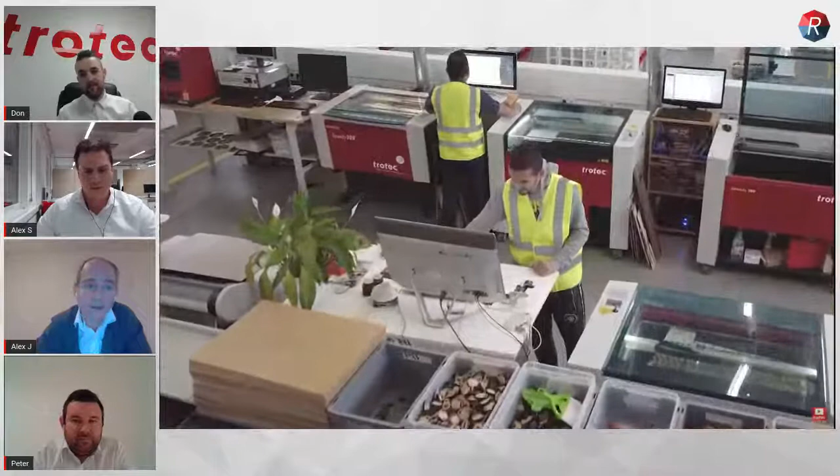On Ruby, we are really excited here at Trotec that now everything is coming together and Ruby and the world are meeting. The response to the open beta is really outstanding. To be honest, in the beginning there was some initial skepticism, and I totally understand, because when you change something that is well known and loved by the people, everybody was like, okay, where's my job control going?

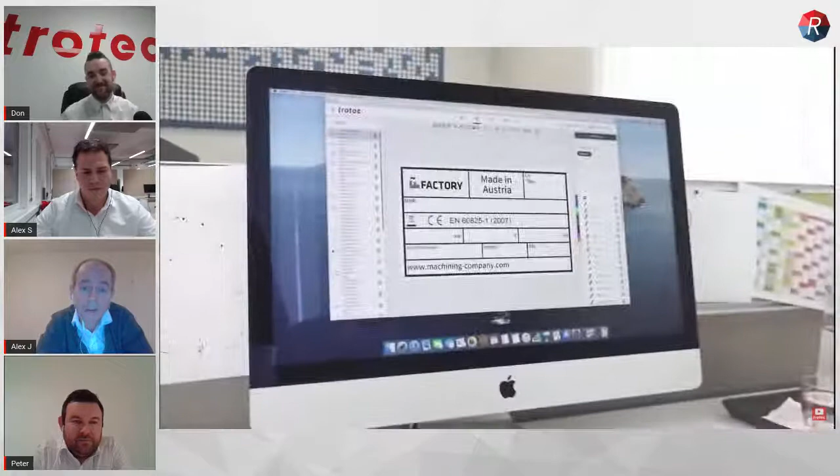And we're going to answer this today too. But now we already have a lot of Ruby fans. People love how the photo engravings turn out, the import functions, hot folders. We're receiving requests that people want to use the Ruby API to connect their web shop to it and to fire their lasers from external software programs. So we just gained a lot of insight in a very short period of time in the last weeks.

And this is exactly why we are doing this open beta, to learn from you and to drive and develop Ruby together with you and to change the laser world. So thank you for your contribution and contributing to Ruby. We're going to continue to do this.

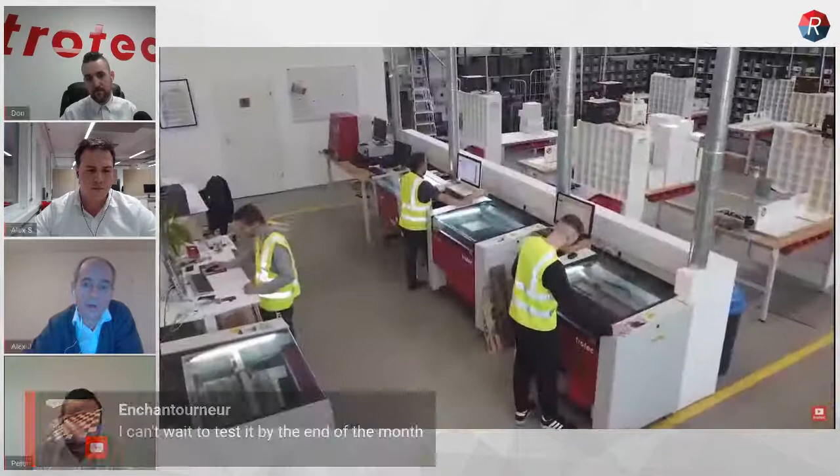So why is Ruby there? We started this initiative, I would say, a few years ago when we developed Job Control 10. So this was quite a while ago. And at that time, we realized that how people work with their lasers has changed. Laser engraving and cutting is not what it was 10 or 15 years ago. It went from the garage to manufacturing settings and to workshops. So it's big business already.

A lot of our customers multiplied their business. So the requirements, what the software should do and has to do, changed and increased. People wanted to operate multiple lasers at the same time from one PC. They want to use Macs, they want to use a mobile phone and tablets to control the lasers. They want software where they can easily create their laser jobs and work with their laser parameters, very simple and straightforward.

And the laser should not be a standalone unit. The laser should integrate into a total overall workflow and exchange information and files with other systems like ERP, MIS, or webshop e-commerce systems. Multiple users, multiple roles, and pre-press integration - that's really a must. So the demands from the users, what we experienced in the last years, really increased.

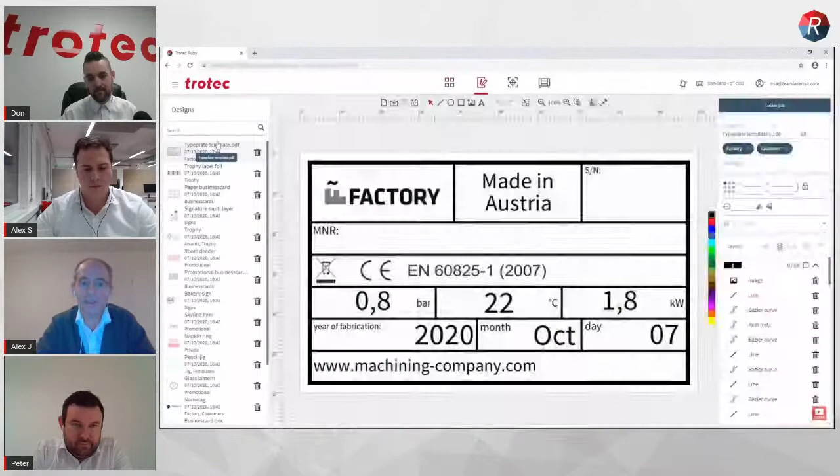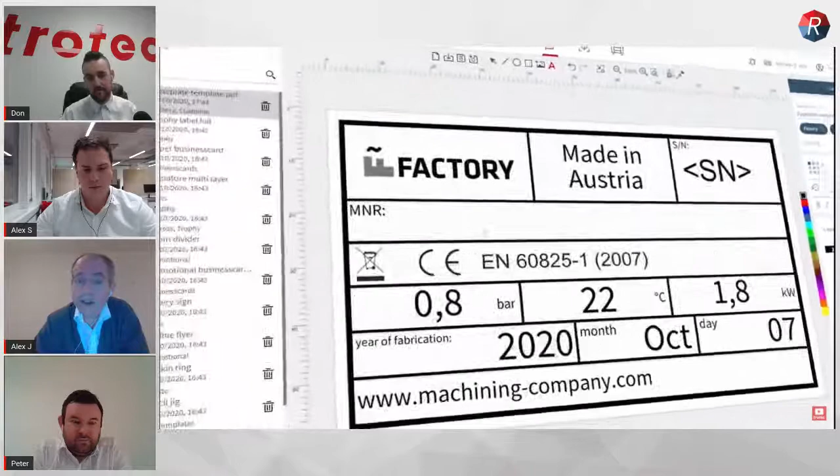And that's what we like to do with Ruby. Ruby stands for all that. We want to connect lasers. We want to connect laser users. Ruby is open to any customer workflow, providing a high degree of automation. And we want to provide laser users with all the tools they need for their daily work, to really redefine laser software and to set new standards for you and together with you.

And we're doing this now with the open beta. We're embarking on a digital journey, and we would like to lead you into a new era of laser engraving and cutting. So that's my small pitch for Ruby.

And now I would like to hand over to the tall Alex, the big Alex, to give you a walkthrough and show you what Ruby is capable of and how it works. So it's your turn, Alex. Thank you, Alex.

Even we get confused sometimes. Well, thank you for the introduction. It's a pleasure really to be here today, to have all of you on this webinar today.

And well, I would like to show you and give you a first demonstration of Ruby, and give you a little introduction to what we can do with Ruby already now with the open beta, and to give you also an idea of where we're actually going. So I think first of all, and probably the most important and one of the most significant changes, is that Ruby is a web-based software.

So this will give us many, many benefits in the future. Because Ruby being a web-based software means we will be able to actually just directly use and access it from a web browser. So in this case, I just opened Google Chrome, and I can directly log into the software and start working with my laser right away. This means that in future we will be able to really access all data, all information, all customer information from anywhere, anytime, just online via the internet.

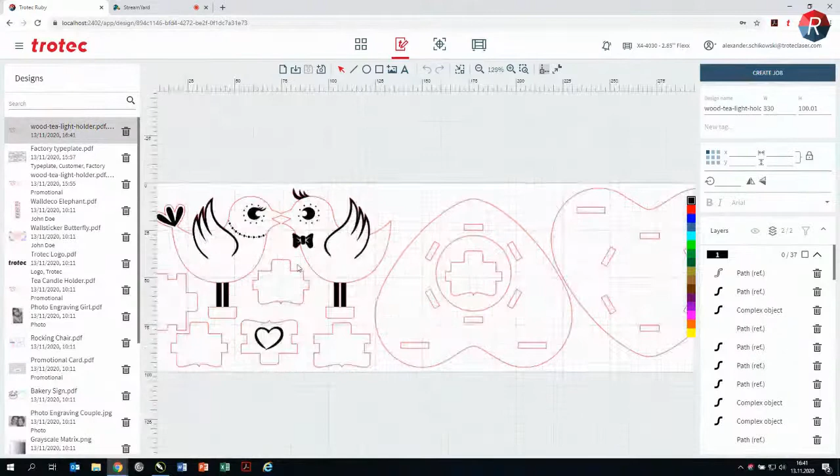So with Ruby, we can just directly drag and drop, import the PDF file. It's here now already, and I'll enlarge my screen a bit. I can directly open it in Ruby, have everything available in here, have the design in here, can have a look at it, can check it, see if everything is correct. In this case, it's all good.

I can create a job out of it now. Just with copy paste, I can duplicate the design, prepare everything for the laser, check, for instance, also the material if it's set correct. In our case, I have some Trotec material entered in the laser. So this is all good, and I can just directly push it to the laser. It's now transferred and can start lasering right away.

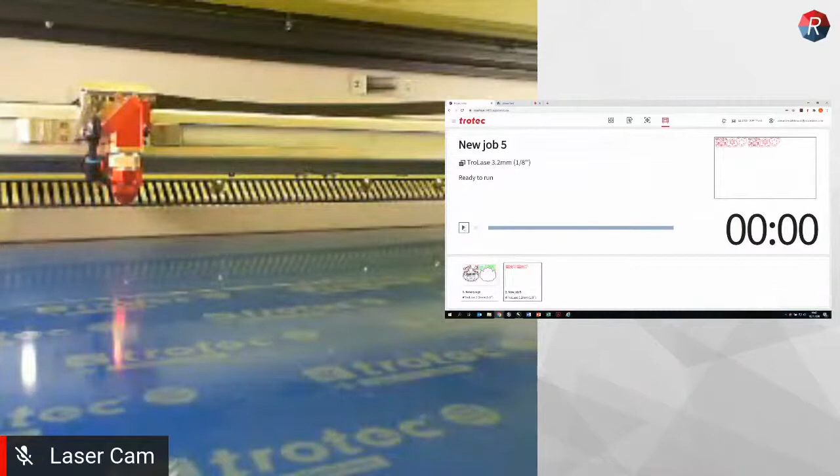The laser you see is already progressing and lasering, firing next to me. I will stop this now for a demonstration and show you another use case.

So you saw how really super easy and intuitive it is to just directly import a PDF file without actually going through any time-consuming printer driver, or also any additional graphic program, for instance. You can just directly import it.

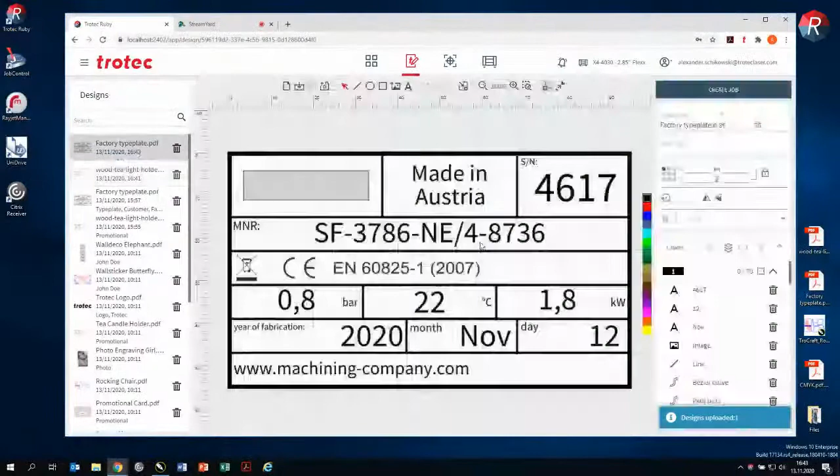But also, even if we need to make some adjustments, I will again just directly import the PDF file in here, can open it in here, and have my design available here as well. Some of you might notice this is the design file we have seen also in the Ruby launch video. And I can make adjustments directly in here now.

In our case, the date is not correct, so it's still the 12th. I can jump into here, make a correction, set it to the 13th of November, and again create a job out of it.

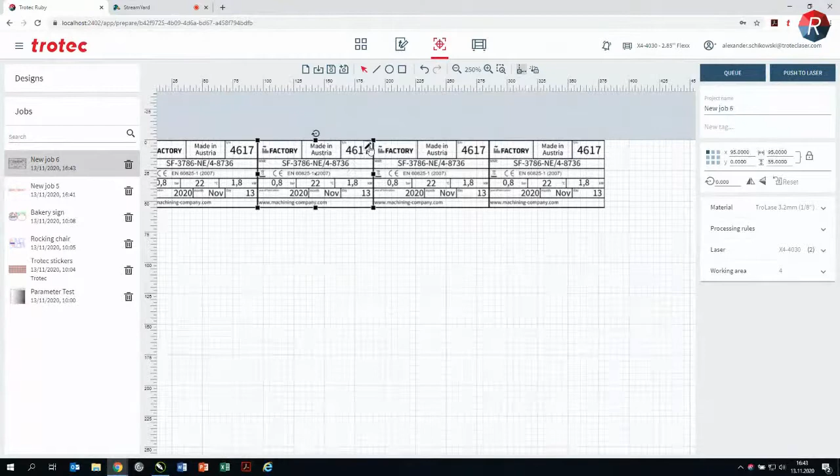I can duplicate it again with copy paste, with the shortcut on the keyboard. And I can also do a kind of small batch serialization now in here. I can directly click on the design, edit it, and increase the serial numbers.

Going to 18, going to 19, and last but not least, this one to 20.

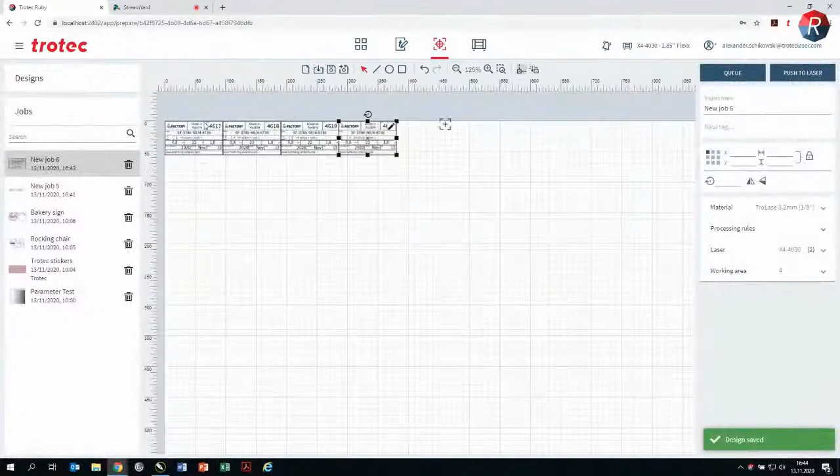I can very quickly make a small batch serialization of these templates directly in Ruby without going to a different software again or any editing program.

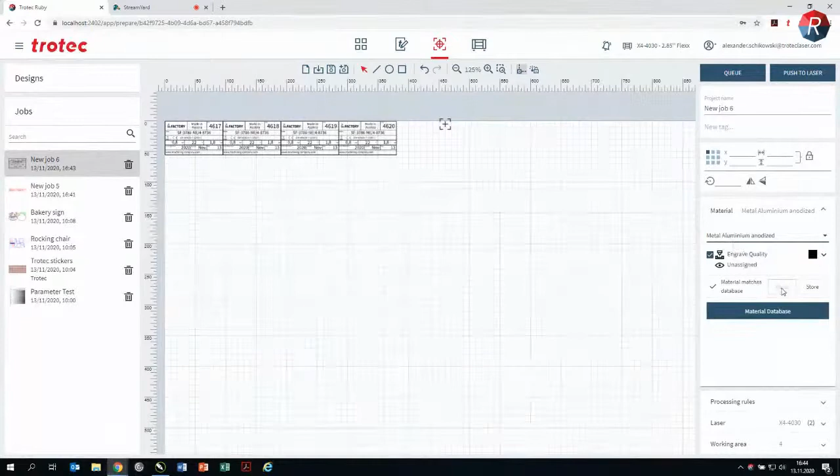And again, just select the correct material. For those templates, let's assume we are using some anodized aluminum. So it would all be correctly set again, and I can then again push it to the laser, and I could start lasering right away again.

So you see also how much flexibility Ruby gives us in terms of graphic editing functionalities. But we also understand that from time to time, users just prefer to actually stay in their graphic editor. And for this, Ruby is also providing some really cool features and benefits.

So during the open beta now, we are also delivering with Ruby a small application for Windows, called the Tray app, which is running here down in the taskbar. This tray app also contains an import folder.

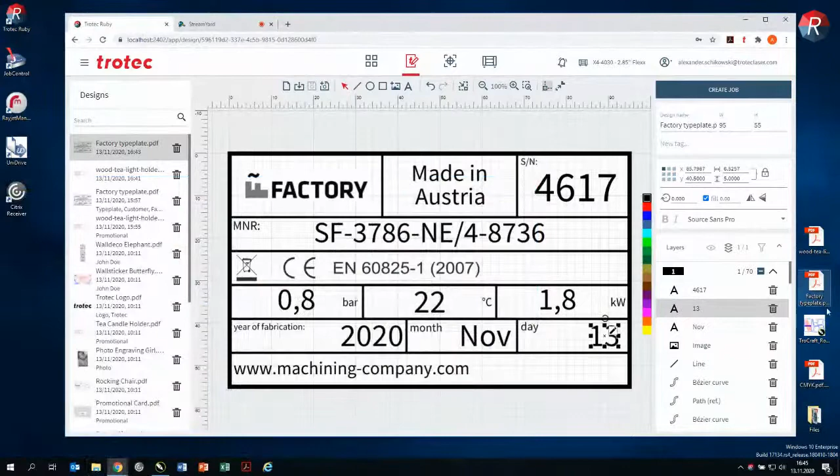So I can open this directory, and whenever I save a file to this import folder, it's automatically uploaded to Ruby. So I also prepared a job in CorelDRAW for you, this rocking chair. And when I push this now, publish this as a PDF, and save it to this import folder, it will automatically be imported in a few seconds to Ruby.

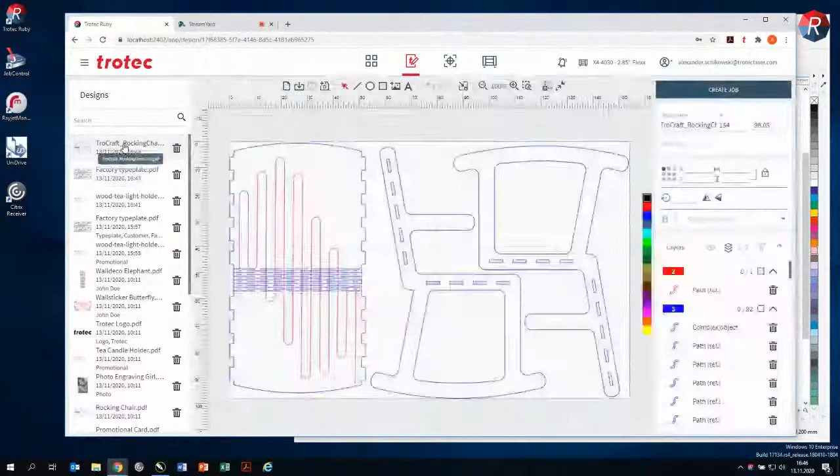And it appears already, it is ready here. So this means you do not have to actually complete the designs, for instance, if you would like to stay with your preferred graphic editing, a graphic editor, you can just directly do all this, but still, as Ruby is directly importing those files, it provides us with a lot of functionalities also now.

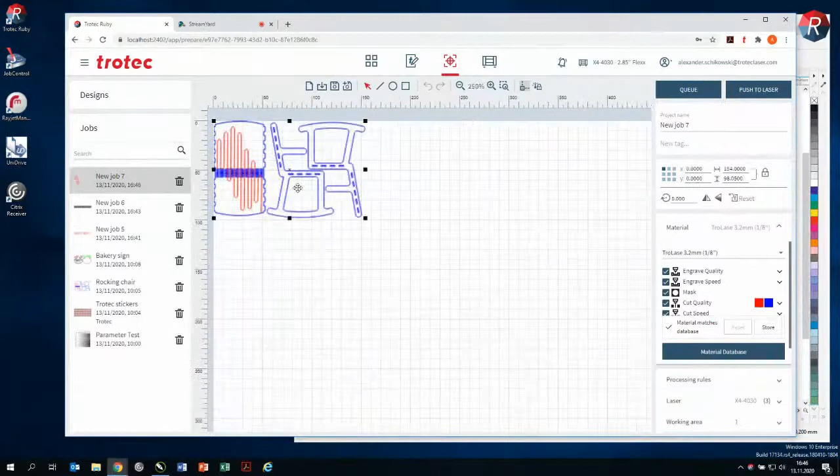We can actually also edit these designs now directly in here. So we can still, for instance, transform them, enlarge them, make them smaller, also rotate them, for instance.

So this just as an example, some examples for use cases, what we can do in Ruby.

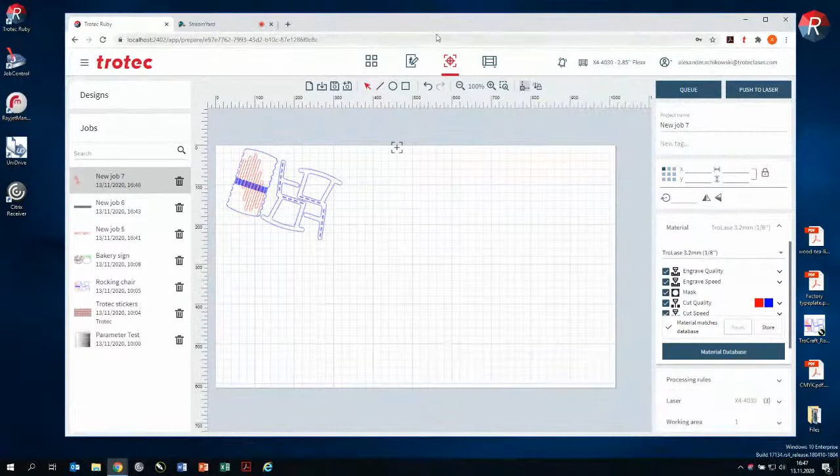I would now also like to go into more detail of all the individual phases in Ruby, because you might have noticed that whenever I progressed in the workflow, we're also changing the pages up here.

So we have basically 4 main steps in Ruby that guide us through the entire workflow. First is the management phase, the second is the design phase, the third is the prepare phase, and the fourth is the produce phase. I will say a few words now about each of the individual phases.

So basically the management phase is there to administrate all our different designs and jobs, but it also gives us the possibility to actually manage them in a more detailed way.

Ruby is now also coming with a system including tags. In the tags we can attach our jobs with some more information that can be used for enhanced administration, but also for instance for searching and quick identification.

So we can, for instance, just attach them with some information on what customer we have made a job for, good old John Doe, but also what type of application it is. Is it a promotional application? Templates, for instance, as well.

And we see here, there's a differentiation between the designs and the jobs. Basically, designs are all the different files we directly import to Ruby, the pure graphic information. And as soon as we attach some material information to it, it automatically becomes a job.

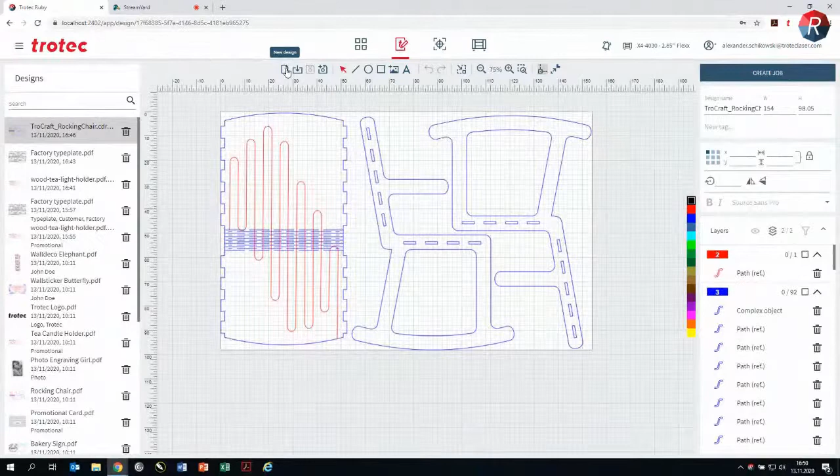I create a new page, and we see here on the top toolbar, we have some drawing functionalities already. For instance, we can make a rectangle. Here on the sidebar, we also have the properties for it, and we can adjust the size, make it 100 by 60, lock the proportions again, and fit this to here.

We can also, of course, add ellipses, circles, or lines, and we can also add text. So I use the text tool to enter some text here, a name, Lucas, for instance.

And here on the side, on the property field, again, we have some additional information and properties to modify this text now. So we can change the font type, for instance, something like this. We could also make it a bit better, make it a bit bold.

And we can also add an image directly here. So add this image of a tractor to it. And it's imported - it's a bit too large now. I'll make it a bit smaller. Increase it a bit.

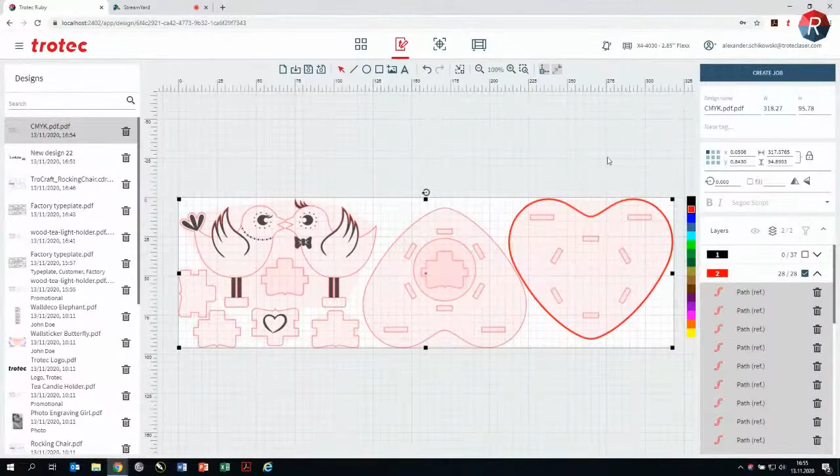I changed this to CMYK. It's recognized, and I can select it now and assign it to this layer, to the red layer, and all is good and can be processed now by the laser as well.

Also, we see here that this was actually not set as a hairline - the line width is 2.83 - and we can make this now directly here in Ruby and set it to 0, making all the adjustments we need. But even though it would not be put to 0 here, the laser can still process it and it will still be recognized as a vector in the prepare phase.

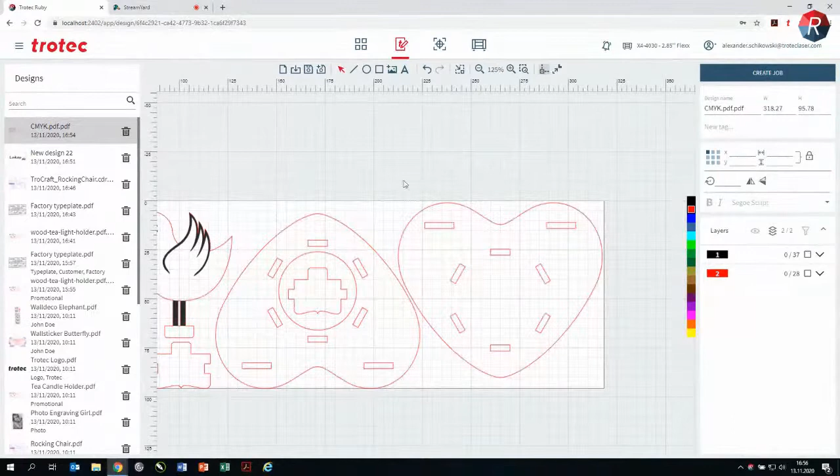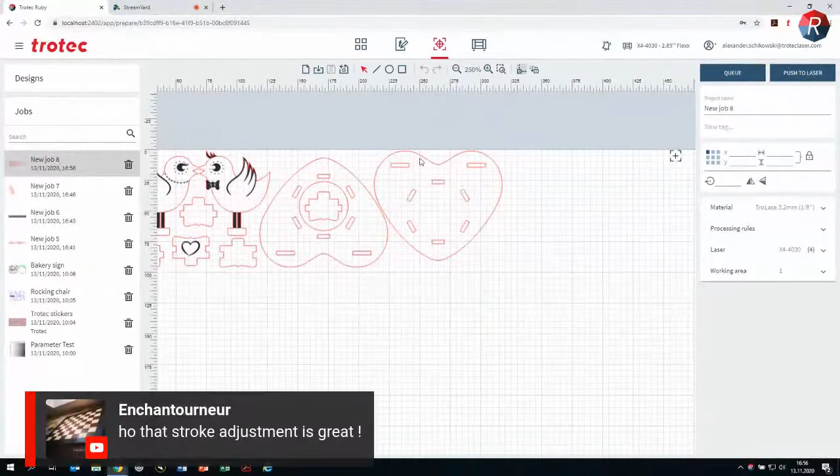Put this back now and show you this in the prepare phase. Create a job out of it. And you see the line is shown as a hairline again. So Ruby recognizes that this is a vector, and you can directly via the material properties assign and say this should be treated as a vector, it should be cut, or if it should actually be engraved.

Let's go back to the design page. Some more things here to see and to show.

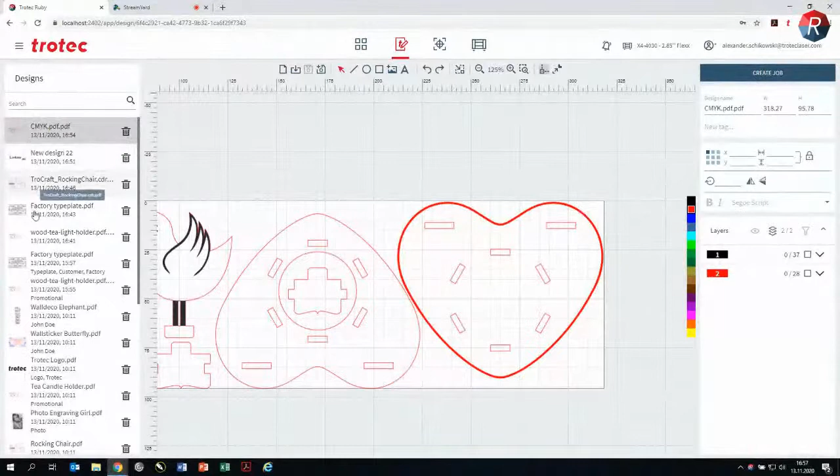First of all, on the left side, we're also having the design list, which basically contains all the different designs we have stored in Ruby. We can either delete them from here, but also open them from here and start working on them. We can also save them as a new design - if we want to keep the original one, we just click here, save as new design, and it's saved now as a new design. And we can change the name here.

Test, for instance. And as mentioned before, we can also assign them with a tag now. We can then later on easily find them again and save it.

Then on the right side, first of all we have the dimensions of the sheet itself, of the job, of the design itself. Then when we click an object, we also see the dimensions of the object itself. We see the coordinates of an object. We can also select different anchor points, so if we want to precisely position them somewhere, and we can lock and unlock the proportions.

Down here we also have the rotation option. We can enter a precise number to rotate an object, or we can just select it on the screen and move it to wherever we want.

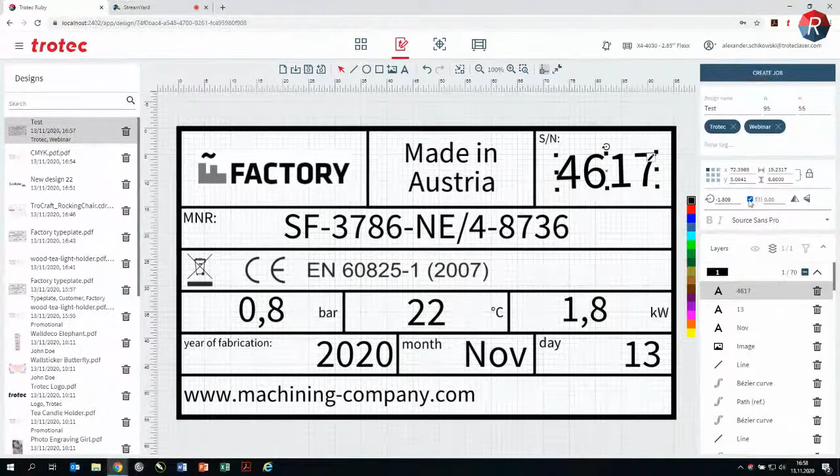We also see the fill option, so we can click and unclick this. When we unclick it, the text and numbers are not filled anymore. This is pretty handy if we want to cut the outline of something to do a very fast processing, instead of engraving. We can fill this again, and we can also change the line width.

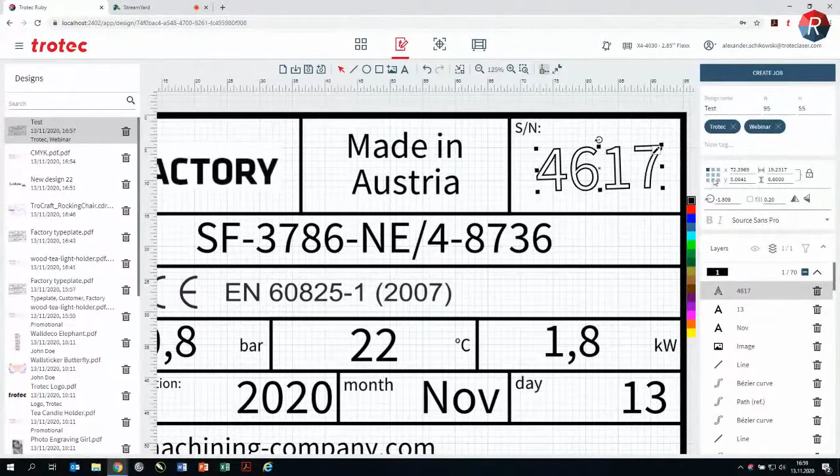0.2, for instance, and we see this is changed as well. Also, we can flip objects and mirror them.

When I save this now and go back to the file we made before, when we select an image, for instance, we can also invert them. So we have this possibility and option directly in here in Ruby as well.

Last but not least, we have the layer card here on this side. First of all, we see the individual objects as they are grouped by the layers we have in our system, but we can also adjust this and change the view to show the object order.

Now we really see the order of all the objects contained in the design. We can change this if we want something to lay over another object, and we can switch the view back again.

Good, so this is basically the design phase. And now let's go to the prepare phase.

Also in the prepare phase, we have the design list again, so we can access all the different designs we have stored and put them on the laser bed. But also we can go through all the different jobs in here.

Basically the ones we created before already. In the middle, we see our virtual laser bed, and down here we see also the crosshair, which represents our laser head.

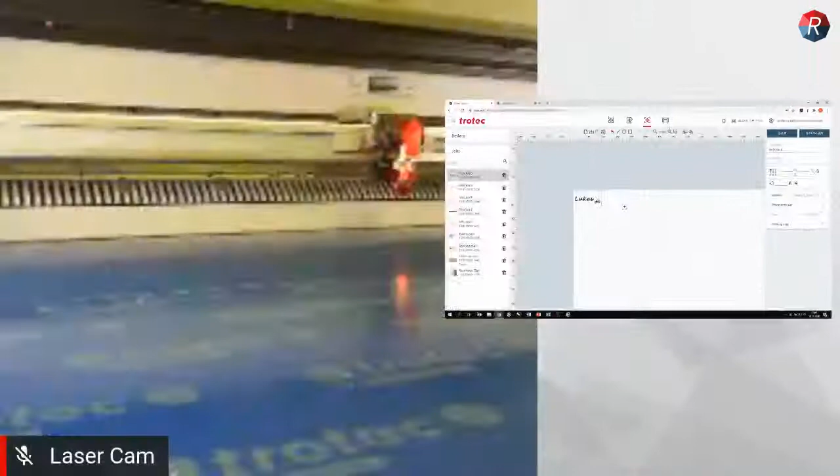There's also a pretty cool and handy functionality in Ruby now, where we can use this crosshair, drag and drop it, and let the laser actually move. I'll just show you this, and we see now on the laser camera that the laser head moved already.

What is this good for, more or less? We can do a super fast and accurate estimation if a design will actually fit on a job. In this case, I could just drop it to the corners and check if the design will fit on the job. I don't need to move the laser manually with the keypad. I can just drag and drop it here and really do this super fast and easy, and immediately clearly see if it will fit on the workpiece.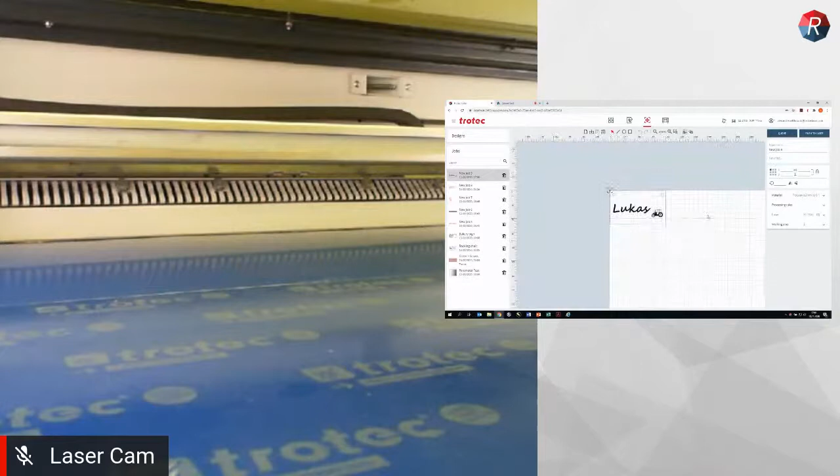Of course, sometimes this moving of the crosshair is not intended, so we can also just lock this. When I lock it, I cannot move it anymore, and it will be safe from being accidentally moved around.

Then on the right side here, we have first of all the name field, where again we can assign a name to a job, but also attach it with a tag. For instance, if this job mainly should be done with TroLase.

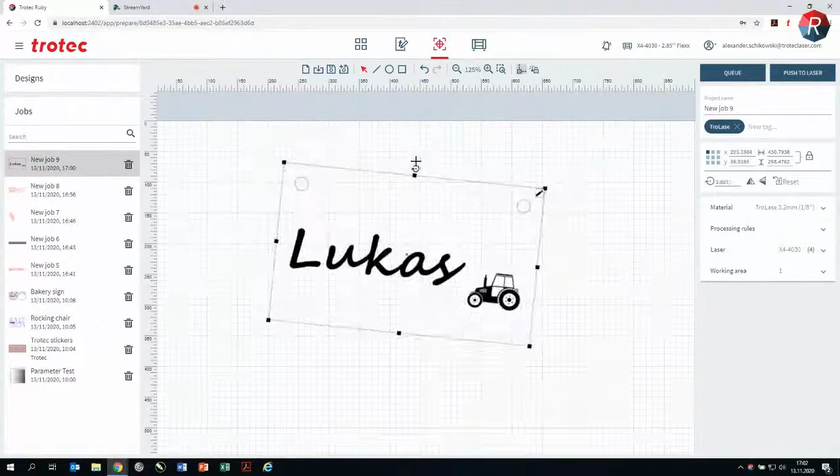We also have the property field, so in the prepare phase we can transform jobs, making them smaller or bigger. We can rotate them. And as mentioned before, we can also duplicate them just by copy paste.

We see the pen, as I showed you before, so we can just directly jump to the edit functionality from the prepare phase if we want to quickly do some small adjustments on the design.

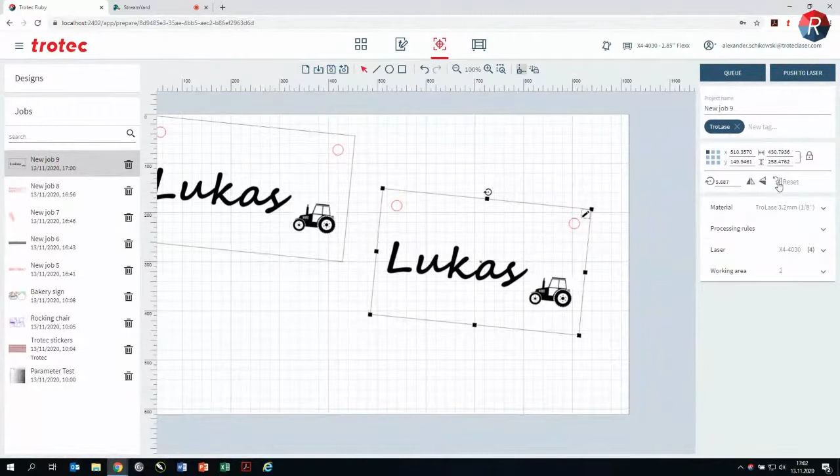Also, sometimes we actually want to reset the job to the original format as it was sent, as it was transformed in Ruby. We can just reset it, and it's again the original size, the original rotation, the original angle. Then we have the material card.

This is probably one of the most exciting renewals we have in Ruby, because I know that pretty much every one of us, at least the first time we got in contact with lasers, thought: why is this so complicated with the parameters? Why are the laser settings so complicated? I just want to cut some piece of wood, or I just want to do engraving of some wood.

I just want to do a dark engraving of some wood.

For Ruby, we completely started from scratch with the material database and thought about this and what we can do on this and how we can actually improve it. We introduced something called material effects to really work on this topic and change it.

We really want to provide laser users with this option, this capability, this function to just select what effect we want to create on a material. So for instance, on some piece of wood, just have a dark engraving or have a deep engraving, for instance.

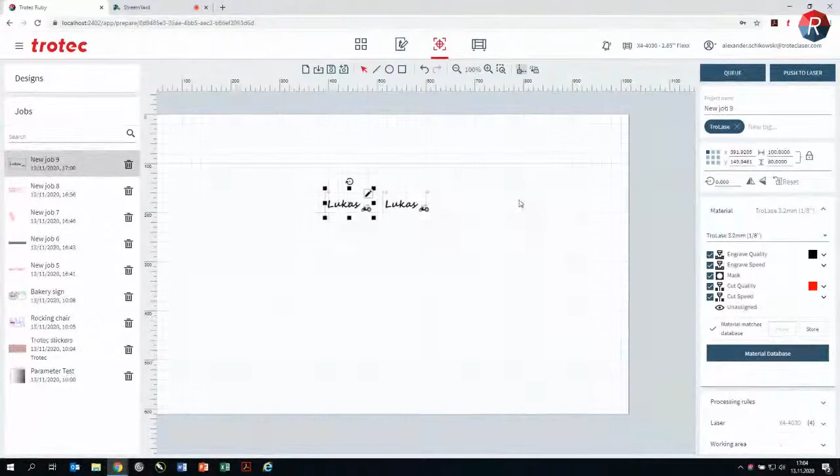We will extend this methodology of material effects a lot in the future. So we have the first, more or less, tranche of material effects now, the first introduction, as it's automatically importing the settings from job control during the installation. But this will be extended a lot in the future, and we really want to simplify the handling of laser parameters a lot.

So what do we see here on the material card? First of all, we see the material we have selected, and we can click here and search for some kind of material, so for instance aluminium or some wood. It shows us all the different materials we have stored in Ruby's material database for wood.

Underneath, we have all the different material effects saved to this material. So in this case, for the TroLase, I have some quality engraving, some speed engraving, a masking effect — I'll explain this in a second — and also a quality cut or a speed cut. Also, if we have some color or layer in our design that's not matching one of the predefined settings in the material, Ruby will show us this in the unassigned area, and we can then easily assign a layer to a material effect we want.

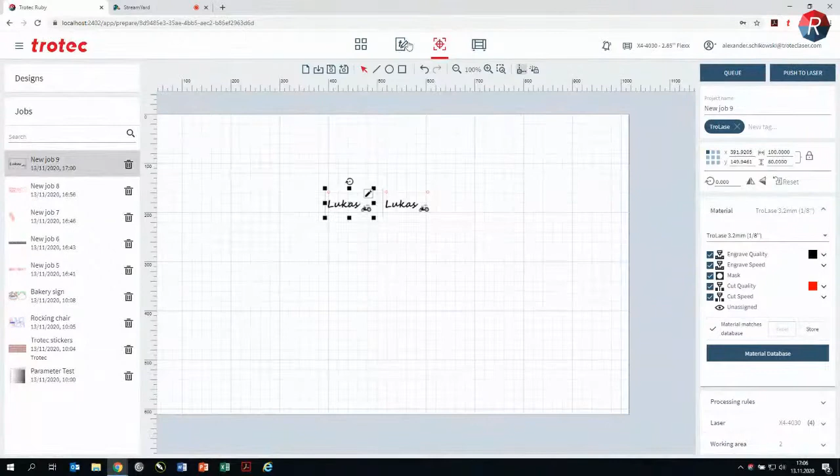I think I'll show this quickly. So I select this one here, put this on the blue layer, update the job. We see now that it's not shown here because it's selected as the masking effect. And if I unassign it, it's here, and we see it transparent, so we see immediately that it's not being processed, and we can just select it and say this should be a speed engraving, for instance.

We've seen it was assigned to the masking effect before. So what the masking effect does is basically, if we have an object overlaying another object, we can say this should actually be a masking and not be processed.

Just to quickly show you this, I'll very quickly create a design — make a circle, fill this with black, draw another circle, put it, for instance, on the blue layer, also fill it, then position it here and create the job out of it.

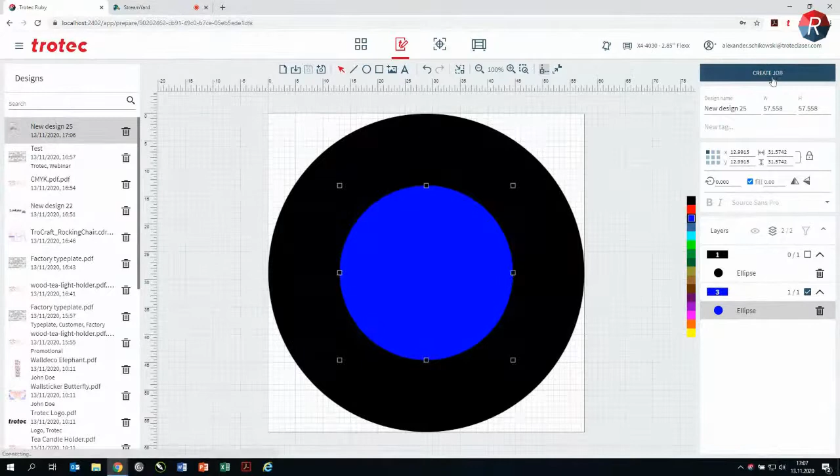We do see now, because it's assigned to the masking effect, the blue circle is actually covering the black one, and the inner one, so the blue one, is not being engraved. We can actually create, for instance, a donut with this now.

If we assign it to the engraving as well, we see that this area will be engraved as well. Or if we unassign it, we see that the entire black circle would be engraved. So this also gives us some functionalities and options in the future to create individual designs and how to build up designs.

Then underneath, we're also having the processing rules, and in here there's also a pretty cool feature hidden. First of all, we have the option and functionality of geometries first, as we know from job control — so when we are cutting, to actually do the inner geometries, cut them first.

But Ruby also brings a new option now, called skip overlapping cut lines. Some of you might know this as common line cutting, as it's often called in the printing industry. What it does is, basically, when two cut lines are overlaying, it would only cut them once. So for instance, if I create a rectangle like this, the cut line in the middle between them will only be cut once.

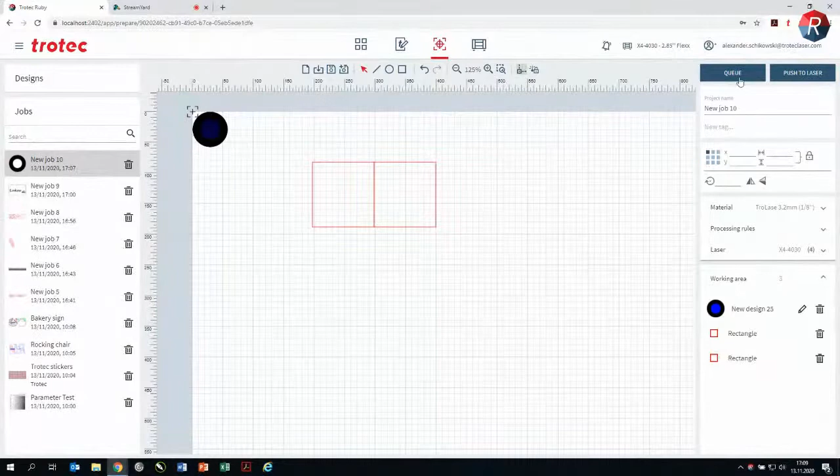We also have the laser card here, where we see some information on the laser we're connected to, like the X and Y coordinates and also the Z. Then we have the working area card, where we see all the different designs and objects currently placed in my job. At the top, we have two buttons, the Queue and the Push to Laser.

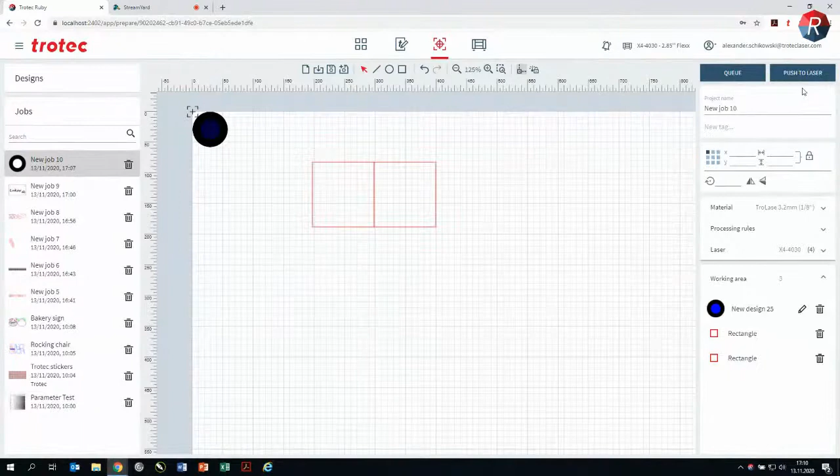This is also a renewal in Ruby, that we're actually having a real job queue. So when we send something to the laser, it's really queued up, and we can process job after job, not like currently in job control where it's more or less a list. It's really a queue with a distinct order, where we can process them one after each other. When I press the Queue button, it will just be added to the queue.

I always get these information boxes here at the bottom, that provide me with information about what just happened. Or I can directly push it to the laser, push it to the queue, and immediately jump to the produce screen and start lasering right away by hitting the run button, for instance.

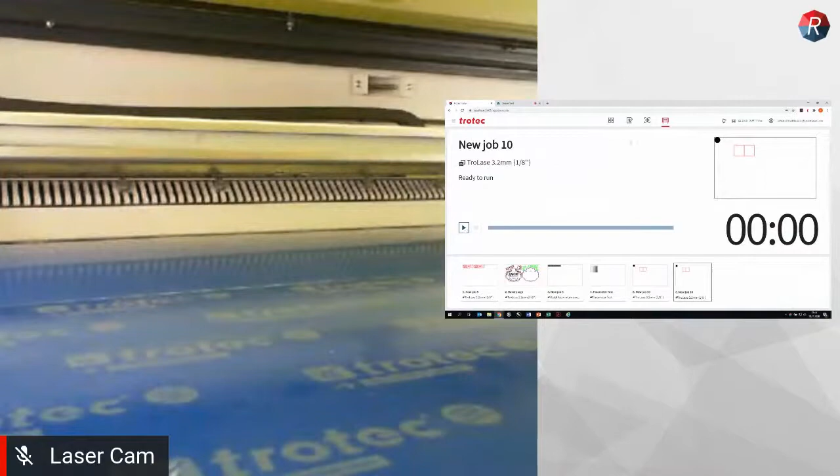So this is the produce screen. What we see here is first of all the queue I just mentioned before. This is really the order the jobs have been sent to the laser now, and the operator could just execute one after each other.

But also, if I want, I can modify the order in here. If I need to push a job forward because it's urgent and needs to be done for a customer right now, I can just select it from here and start it directly, if the laser is not running at the moment. I could also change the order for production based on importance.

Then we see the name of the job in here. We see the material that is assigned to it, and we see the current status of the laser. So if there would be an error or any kind of issue or warning, we would see this here, and would also get one of the notification boxes we've seen before.

So these are basically the four main workflow steps we're having in Ruby. To show you some more on the main menu, I mentioned before the material database. We will jump to this now.

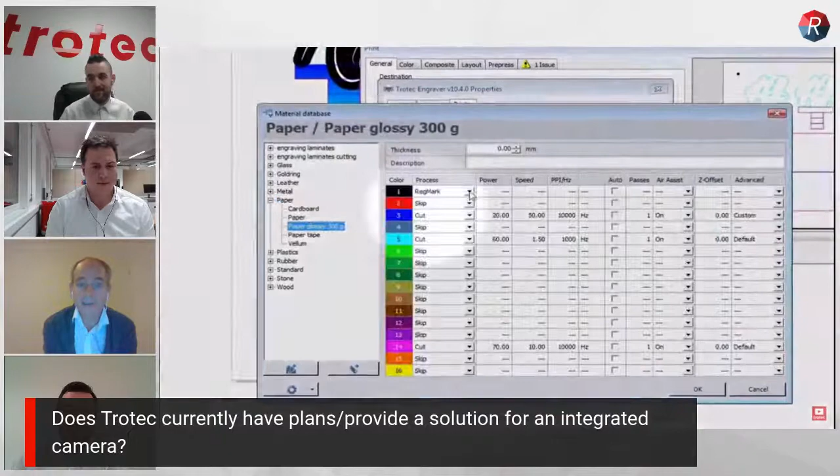We launched the Job Control Vision, but at the time it was called iCut, in 2001 already, and Job Control Vision was 2012. And on the Speedmarker series, on the Galvo systems, we have off-camera systems, where the camera has the view on the working area, and we have systems where you see with the camera through the Galvo head, directly on the working area through the laser head. So very sophisticated solutions here, and you definitely can say that we believe in vision systems and the benefit that vision systems bring to laser engraving and cutting.

Yes, it's coming, it's coming next year. Next year is going to be busy. No, it is already busy, because you know what hits the market next year is here, now, in our work and our daily life.

I should say, I have a question here, and I will go back to Alex in the applications lab. Thank you so much again for the demo. I want to give you some time to just rest and relax, I know it's tough to talk for that long straight, but thank you so much for the demo. It was fantastic.

I have to ask, as someone who is deeply connected to the consumables here in Canada, I have to know if it's going to be possible to connect a web shop with Ruby on behalf of all the customers that I know I sell consumables to, who have their own web shops and web businesses online.

Well, that's a very good question. And as I mentioned in the beginning, initially, really, Ruby is a web-based software, and there are many things coming with this. We really see the future of laser users, of lasering, as a connected one, and really also kind of Industry 4.0 and all these things are coming to the laser world as well. And one of them clearly is also connectivity with other systems, as you mentioned, web shops.